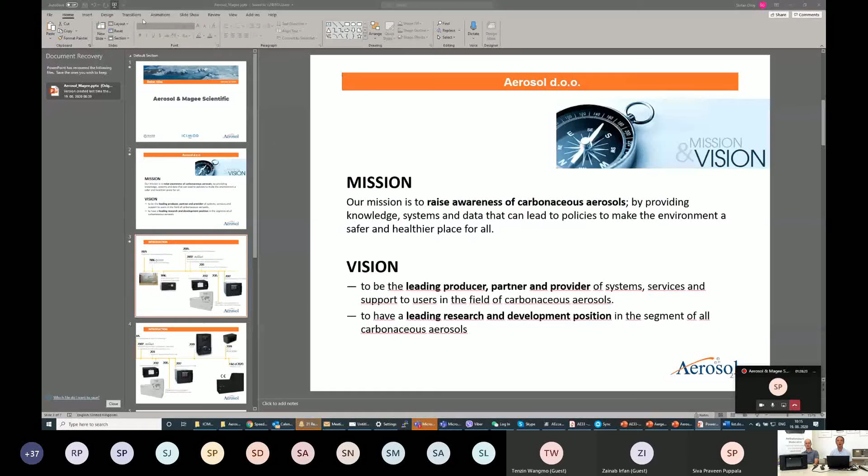Our first Aethalometer we introduced about 40 years ago. It was produced in California, United States, and Magee Scientific as a company started to produce and sell Aethalometers, or black carbon monitors, in 1986. In 1996, the production was moved to Slovenia, to Europe, and in 2007 we established the company Aerosol in Slovenia with full R&D and production capabilities.

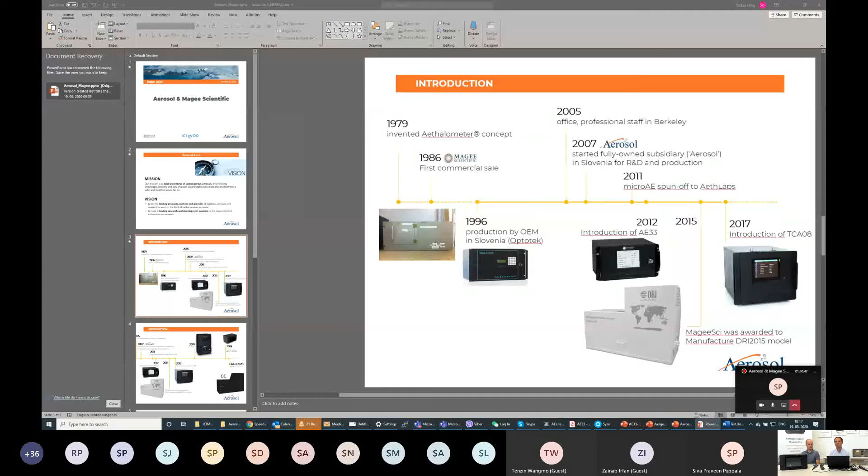The current version of the Aethalometer, the AE33, which we will talk about later on, was introduced in 2012. In 2015, we were awarded to manufacture the DRI instrument. This is an offline OCEC instrument. In 2017, we introduced a new thermal instrument for total carbon measurement. And in the last 2 years, we introduced CASS, the Carbonaceous Aerosol Speciation System. It's actually a combination of the total carbon analyzer and Aethalometer, and with these instruments we can measure the whole carbonaceous aerosols in ambient air.

Last year, we introduced the new portable Aethalometer, AE43, based on the same technology as Big Brother AE33, but with half the weight and half the dimensions, smaller. And this year we will introduce the new version of the DRI instrument, with some technical improvements.

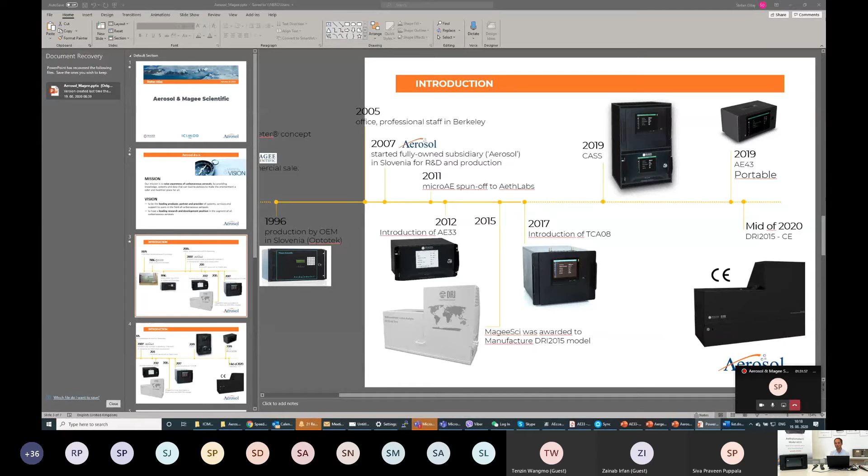Our aethalometers are all over the world, from Antarctica to the Arctic, from some deserts in Africa up to the top of the Himalayas. Last year we produced the 1,000th aethalometer, and of course our network of aethalometers is still growing.

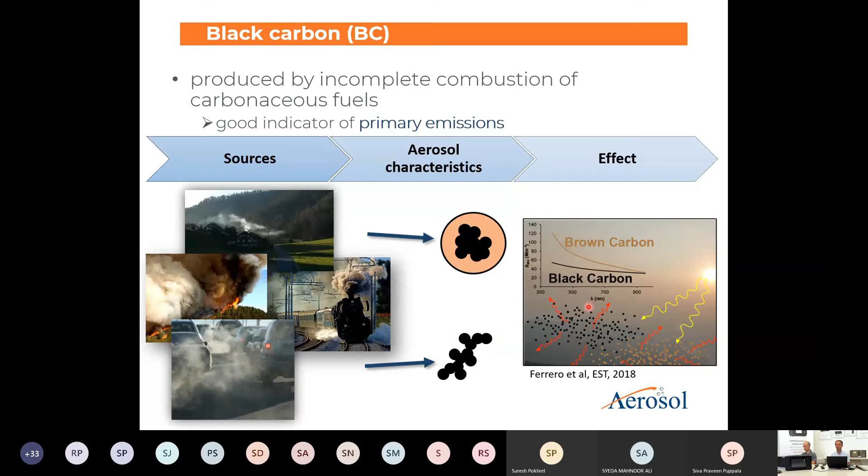These are special events, but in our world, one of the very significant sources is traffic, which uses mostly fossil fuels. Then this aerosol has some characteristics, like it could be fresh, could be old and already coated with some other elements, and has some effects. What is maybe more important is that black carbon absorbs light, and especially this effect, that it absorbs light, we use in our instrument to measure the concentration of black carbon.

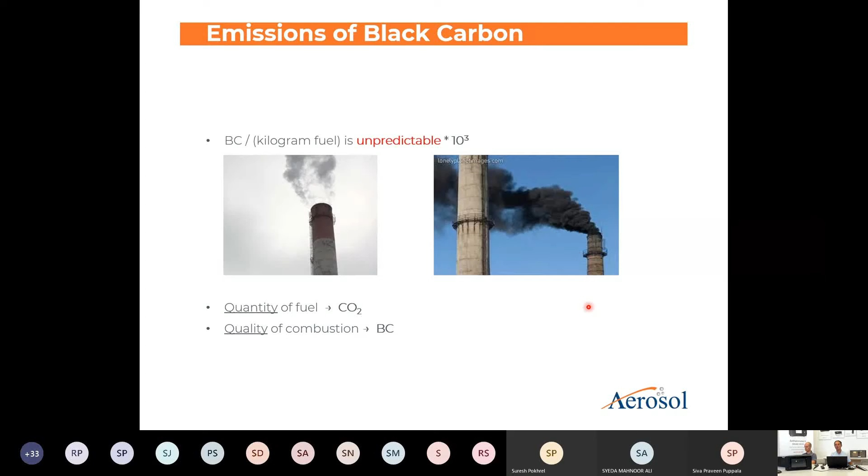Just as an opposite, CO2 emissions are highly predictable, because we just need to know how much fuel we burned, because from 1 kilo of fossil fuel we always emit the same amount of CO2. So black carbon, and this is very important for us, is highly unpredictable. So we cannot know in advance how much black carbon we will emit during the combustion.

Double role of the black carbon. Black carbon has two main roles. One is health effect, because the black carbon is very small and can penetrate even to the blood, because particles smaller than 100 nanometers can penetrate deeply in the lungs and even into the blood. So this is one very important issue of the black carbon.

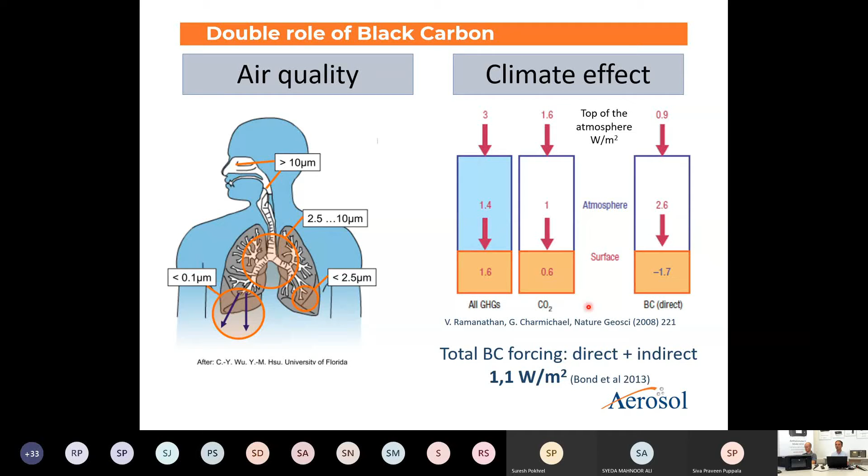Second is of course climate effects, and you probably know much more about these climate effects, but the latest research shows us that total BC forcing is about 1.1 watt per square meter.

And of course, all these properties of the black carbon lead us to our final conclusion from Lord Kelvin, as Lord Kelvin said a lot of years ago: if you cannot measure something, you cannot improve it. And because we want to improve the situation with the black carbon in our environment, we have to measure black carbon. That's why we produce an Aethalometer, which we think is the most advanced black carbon monitor in the world currently.

The Aethalometer for black carbon measurement is about 40 years old. Also, the principle of the measurement is 40 years old, and the principle is quite straightforward. We just draw an air sample continuously through a filter, and we collect the aerosols on the filter. Then we illuminate this filter, and we measure the optical transmission through this filter.

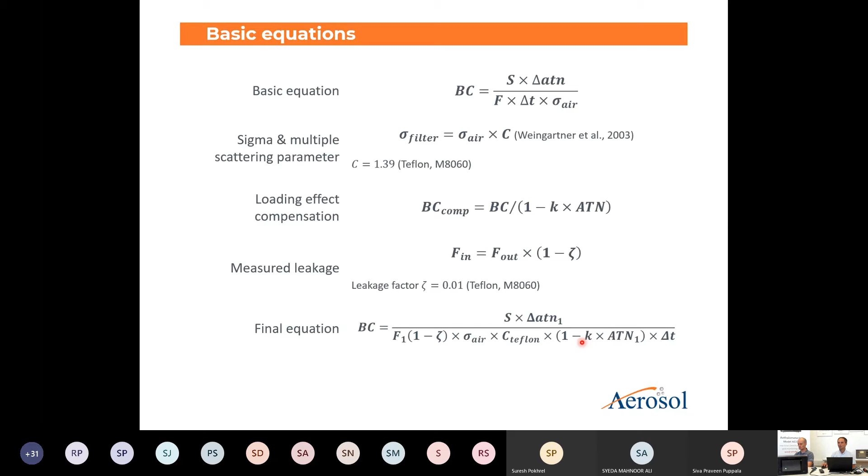Okay, so this is the equation. All these parameters could be found also in our instruments. Let's say, for instance, the surface area is fixed, and you can find it in the setup files. Black carbon concentration is on the main screen of the instrument. Delta T, or time base, is also on the main screen. Then delta attenuation, you have to calculate it out of this table, which is on the data tab.

Then you have here all information about the flow. Also the K factor is here, sigma air, and leakage factor, and the multiple scattering constant for the tape is also. So all these are here somewhere in the user interface.

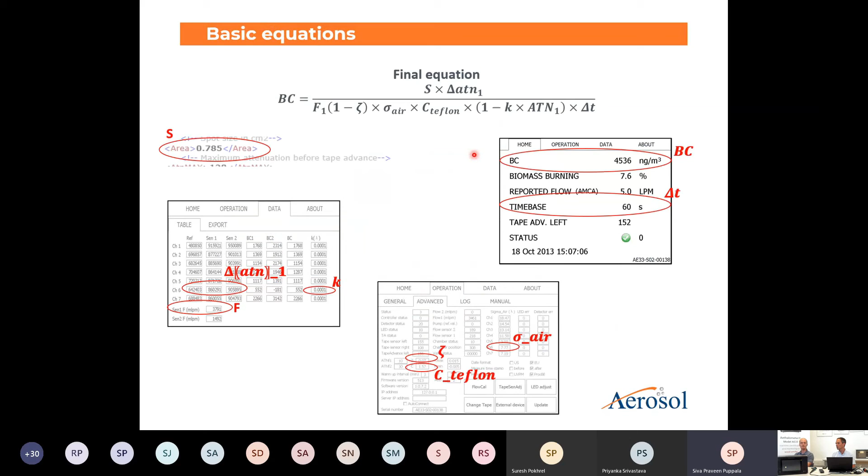I think the slides are not changing. Sorry? I think the slides are not changing. No. What do you see? Do you see the flow diagram? No, we see only basic equations. Really? I see the flow diagram. Yeah, because it's changing. I also see the flow diagram. Yeah, it is changing. Okay, must be an issue, right? Okay. It's okay? Yeah, please go ahead, Stephen.

Okay. So this is the flow diagram. As I said, we have 4 valves here. These 4 valves are because we want to lead the flow on different paths through the instrument. I will describe just two situations. If everything is normal, then we draw the flow like this, through valve number 4, and here we have a flow divider. We divide our flow into 2 different flows, one through spot 2 and one through spot 1, and then it goes through the mass flow meter to measure the amount of the flow, and then through the pulse damper and pump to the outlet. So this is the way of flow during the regular measurement.

We have some tests to check if everything is okay with the instrument. For instance, when we perform the clean air test, we close valve number 4, put it to position 1, and we open valve number 3 to 1, and then the flow goes like this. We start with the ambient air, go through the filter. This is the particle filter, and with this filter we completely remove all particles from the sample, and then the aerosol-free sample goes the same way. With this test, we can check the noise of the instrument.

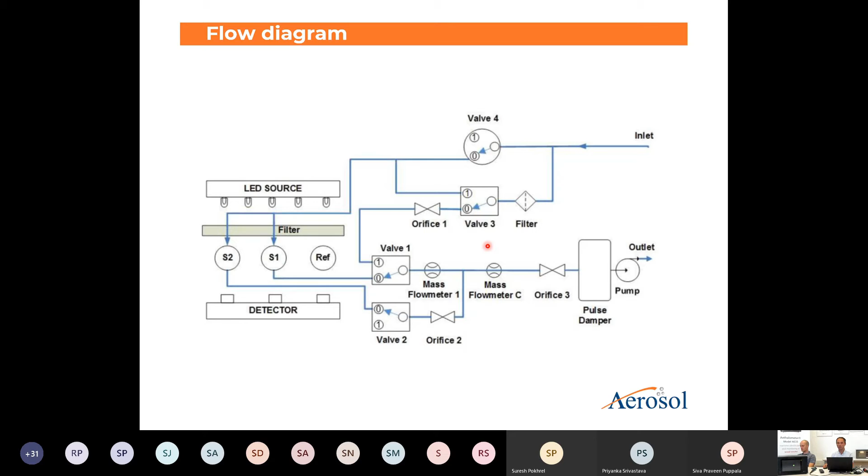During the clean air test, we expect that we will measure concentration close to 0. We will measure just the noise of the instrument. So this is one example how we can change the path of the flow through the instrument. And we have also other tests. When we calibrate the mass flow meters, we again change the flow through the instrument just to calibrate the mass flow meters. So that's why we have 4 different valves here. But this is the basic flow diagram of our instrument.

So now I will proceed with a few technical details of our instrument, which technical aspects are very important. One of the most important is the wide dynamic range of this instrument. On these 2 charts, we have 2 different examples. One is taken in Berkeley, California, where there is, especially during the summer, very clean air, and we measure a black carbon concentration of less than 50 nanograms per cubic meter.

The second case is from Kolkata in India, where we measure a concentration higher than 100 micrograms per cubic meter. That means between these 2 examples there is more than 2,000 times difference. And we did this with the exact same instrument without any exchange on the inlets or something like this. So this wide dynamic range is important for such measurements, and we are really very high with the dynamic range of the instrument.

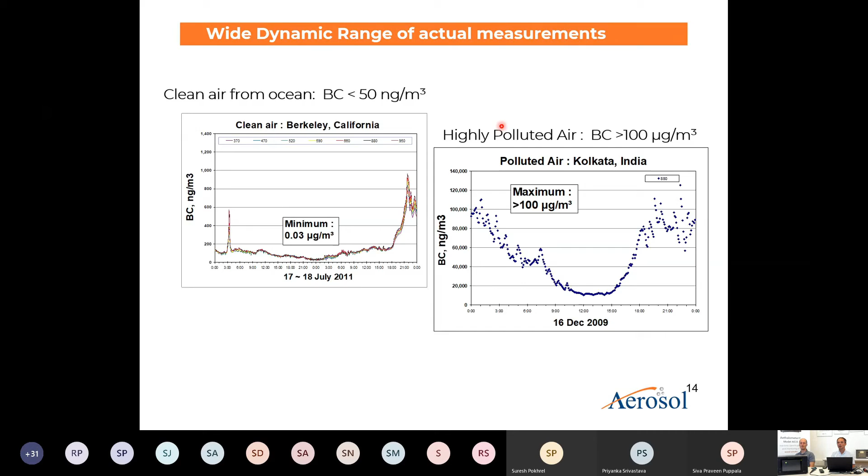Second technical aspect, what is also important, is the real-time measurements. The instruments measure with 1 minute or with 1 second of time base. Here is one example, where we have already 5-minute averages of measurement close to one street in one location in London.

With some post-processing, we got this type of chart, and what we can see here is a pattern: we have these morning peaks during the work days, especially Monday, Tuesday, and Wednesday, and then we can see that we don't have these morning peaks during Saturday and Sunday.

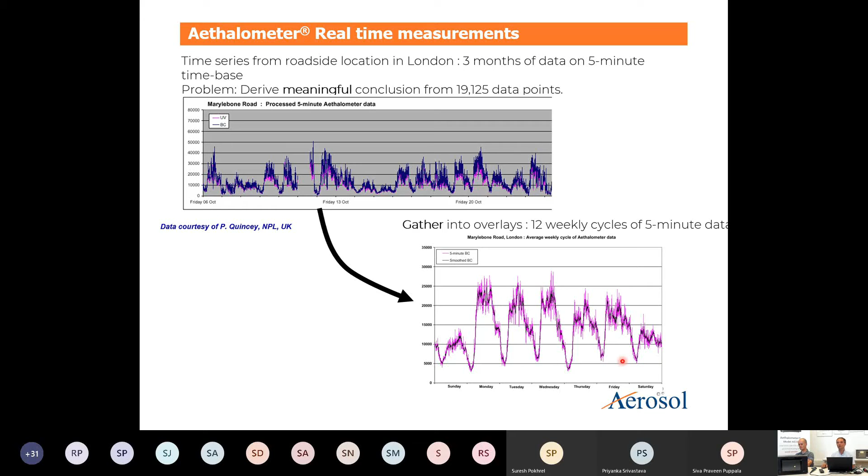So if you want to observe this diurnal profile, then you have to have as much data as possible, and this time base of 1 second assures you that you can really find some patterns in concentration during the day. Because our period is very short, 1 second, you are able to find some interesting patterns in the concentration of black carbon in the air which you measure. This is also very important.

Then this is maybe the most innovative feature of our instrument, loading effect compensation. As I already said before, when you collect the aerosols on the filter, the spot becomes darker and darker, and after a certain time you have to move to a fresh spot. You need to perform a so-called tape advance. But what is important is that inside of one tape advance period, we observed that the response is not directly linear. So with high attenuation, you will measure lower concentration of black carbon. It's not directly linear.

On this chart, the black one shows non-compensated black carbon concentration. The red one shows the already compensated data. This is the event when you move to the fresh spot, and in the non-compensated data you can see this big jump, and here again a big jump, while in the red line, which is already compensated, you don't see this jump. This is because the response is not linear, and when you change to the fresh spot, in the case of non-compensated data, you will see this big jump.

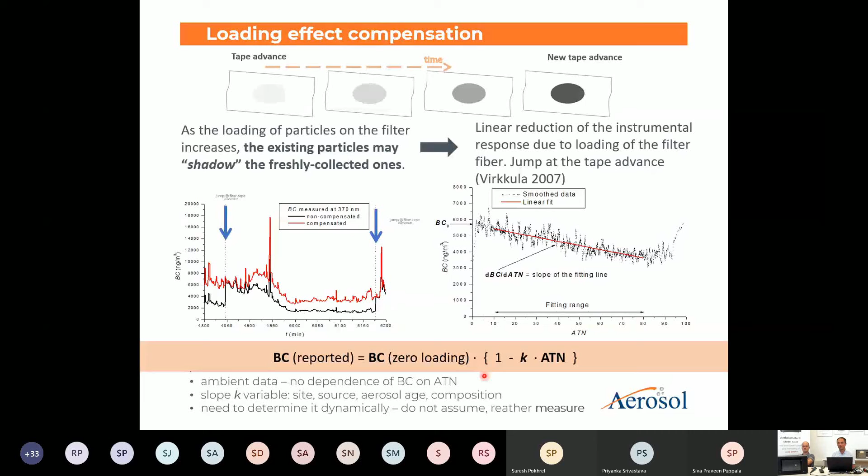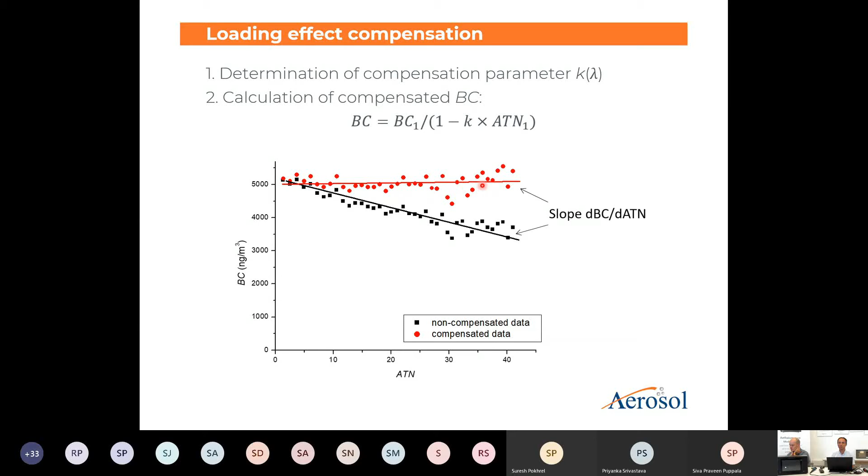And here is the equation. The reported BC must be compensated with the BC at zero loading, and you have to introduce this K parameter. The K parameter is well known; you can find more details in this scientific paper from Virkkula. Of course, you can do this with post-processing. With this K, you actually change the slope to a linear one, so that the attenuation will be linear with the concentration.

Our solution for this problem is the dual spot method. Dual spot means that inside our chamber we have a splitter that splits the flow to two different spots, in a ratio of 2/3 to one spot and 1/3 to the second spot. Because of this, we always have two spots on the tape, one darker and one lighter. When we calculate the black carbon from the darker and the lighter spot, we find two different concentrations because of this non-linearity, and out of this non-linearity we can calculate the K parameter.

What is very important, we can calculate this K online, so we don't need to wait and do this with post-processing. We can calculate it immediately and include this calculated K directly into our equation for the compensated BC. With this K, we calculate the compensated black carbon concentration without any jumps. As we can see, after changing the spot we have these jumps, but on the compensated BC these jumps are not visible anymore.

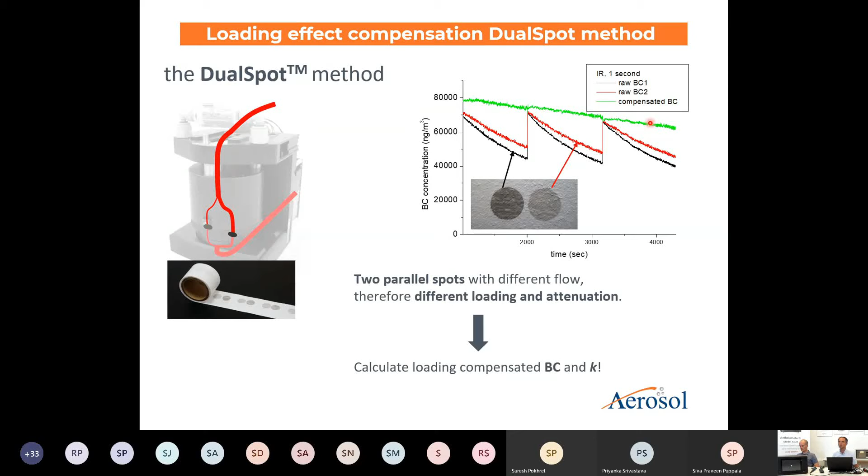I would like to mention that this dual spot is patented, and of course we are the only producer in the world which can use it. This is really, let's say, one of the big advantages of our instruments, that all data are directly compensated, and there is no need for post-processing. This is especially important if you want to immediately present or use the data on some web pages and so on. There's no need for any compensation or any recalculation of the concentration.

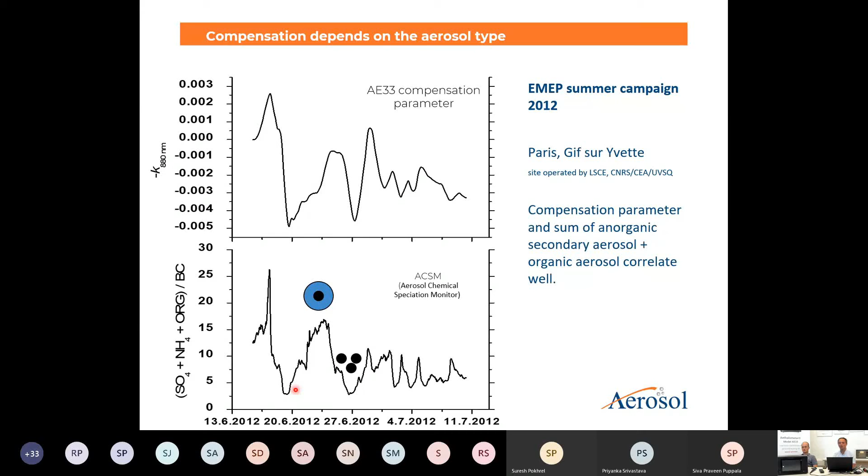And again, this may help you to discriminate between fresh and old black carbon. Where you have a high K factor at 880 nanometers, it means you measure old aerosols, old black carbon with some coating on it. And when you measure a low K factor, it means that you have fresh and very local black carbon aerosols.

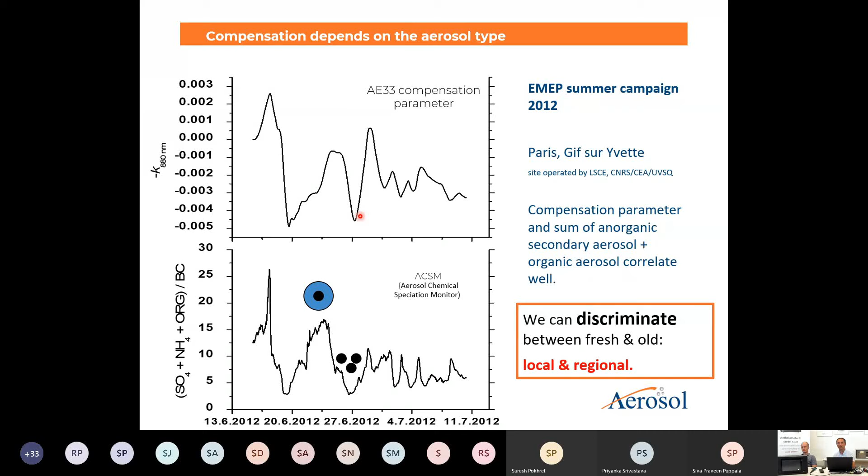A few more words about the loading effects: this algorithm is very sensitive, especially to temperature and humidity. And this is also true in general for the measurement. So if you want the instrument to measure properly, you have to warm up the instrument to room temperature. If you bring the instrument into a room, you have to wait for a while until the temperature of the instrument is the same as the room.

So you cannot change the humidity very fast, and also the temperature needs to be as stable as possible. It means that it's not very useful if you have air conditioning equipment close to the instrument. Also, this K factor is very small, and the default has some limitations: K minimum and K maximum between 0.005 and 0.015. But expected values for K are between 0 and 0.001. So this is some additional information about this K factor.

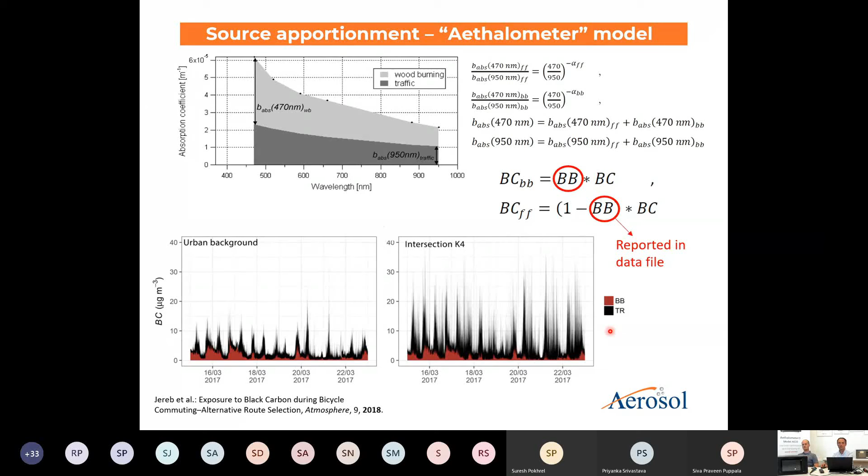So here is, let's say, a short overview of our aethalometer. Our aethalometer uses multiple wavelengths, and we measure absorption from the ultraviolet up to infrared wavelengths. Then we have a really high dynamic range. We also have loading compensation. This is done with the dual spot technology, which is patented, and we can do this in real time.

Then we have some automated quality assurance and quality control tests with zero, optical span checks and flow calibration. We will see this more later. We have really improved performance with low noise and fast time resolution, with the time base down to 1 second, and our instrument is quite easy to integrate into networks and easy to communicate with. More about dual spot technology can be found in this scientific paper.

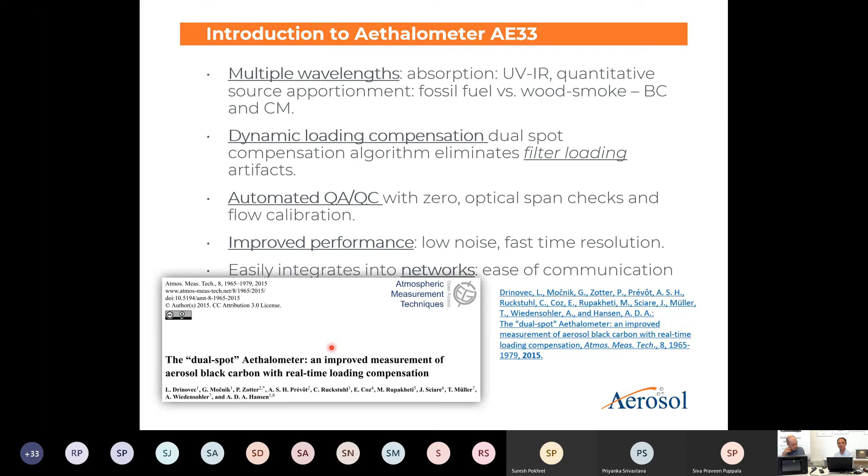Do you have any questions after the first part? Or should we proceed with the application examples? We can proceed.

Okay, if there is no question, then just a few words about application examples. I have a lot of slides here, but I will just go through them briefly, because later on Friday you will discuss much more with Martin about the applications which can be performed with our instrument.

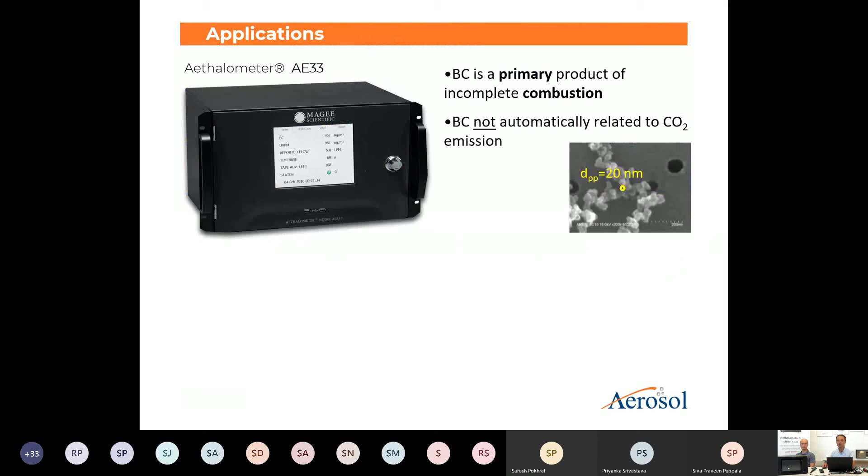Okay, so our instrument, our aethalometer, is used in different applications with different types of customers. Source apportionment of black carbon is a very typical application. Then we have a lot of applications related to low emission zones, transport abatement and everything related to traffic. Then we have applications connected with local and regional transport of air pollution, and a lot of studies about emissions in

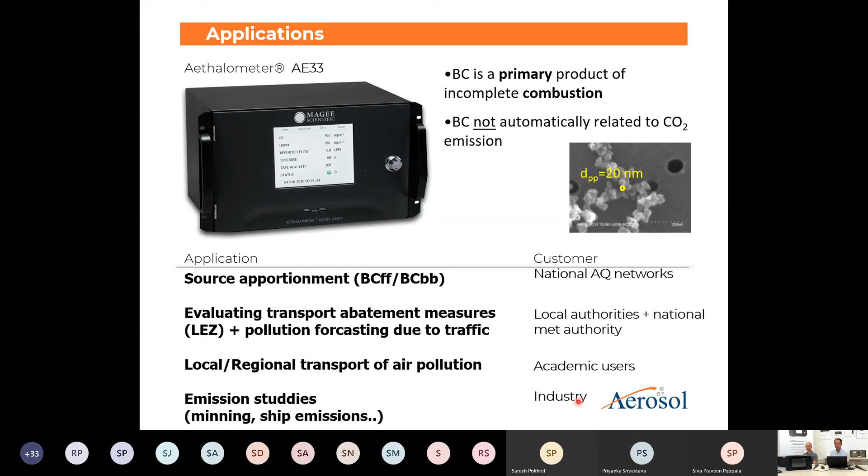different environments. Our customers are national air quality networks, local authorities and national meteorological authorities, academic users, and more and more often recently also industry. I will briefly point out a few of our biggest customers. One is the National Air Quality Network in the United Kingdom. They have more than 20 aethalometers installed over Great Britain. They measure source apportionment, ship emissions, traffic restrictions, and regional impact.

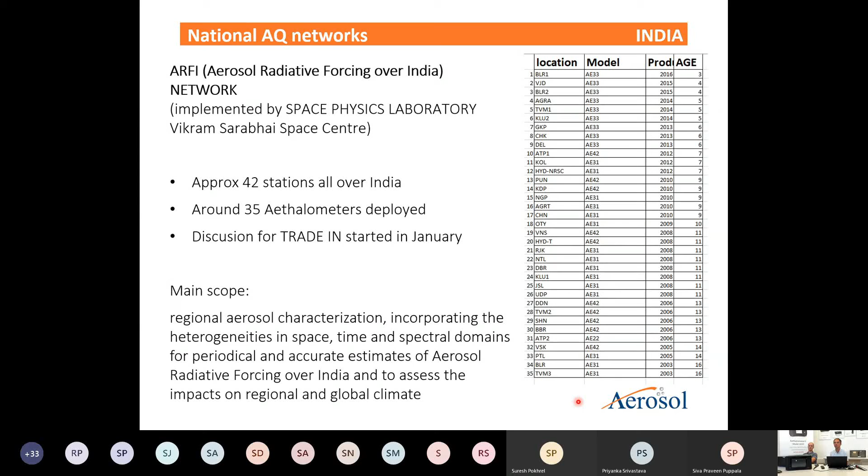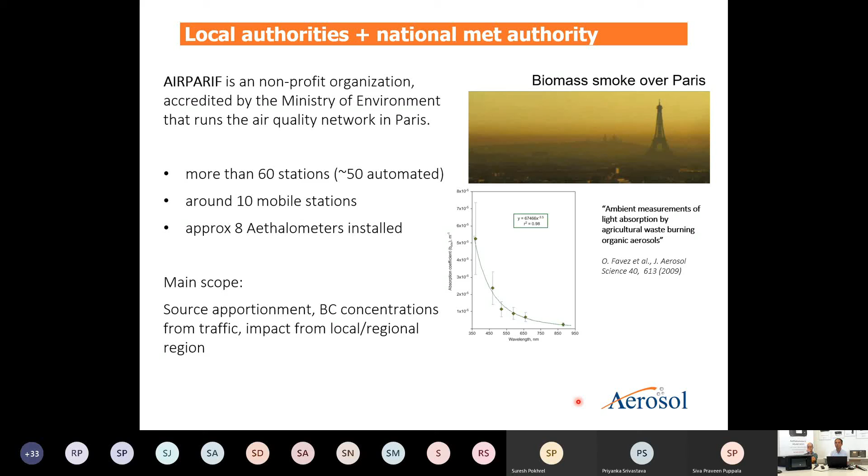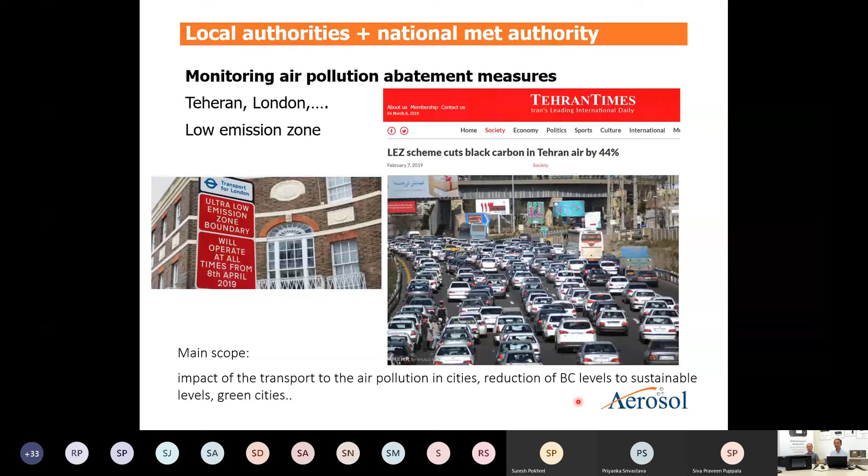Then from local authorities, we have installations in a few big cities like Paris. They also have some mobile stations. Then we have quite a huge installation in Tehran, Iran, and of course in London also. They are always related to so-called low emission zones in the city centers. Then here is one very interesting application here in our capital.

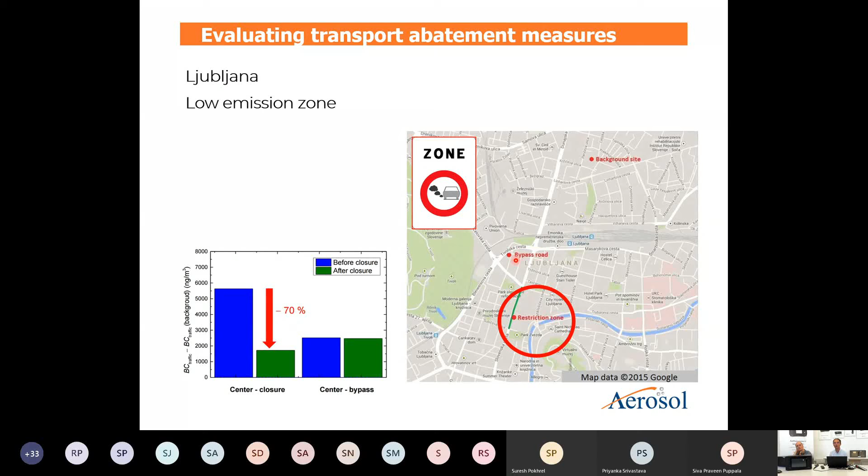There was an initiative to close the downtown center to traffic, and we can see that after they closed the center to traffic, there was 70% less black carbon in the air. At the same time, we also had one control instrument on the bypass. We didn't observe any increase of black carbon on the bypass. So this is one example of how we can measure and improve our environment.

One very interesting application is also emission factor measurement. If we combine our aethalometer with a CO2 sensor and measure CO2 and black carbon, we can calculate the emission factor. The emission factor is proportional to the ratio between black carbon and CO2. This is quite a nice application, interesting for local authorities.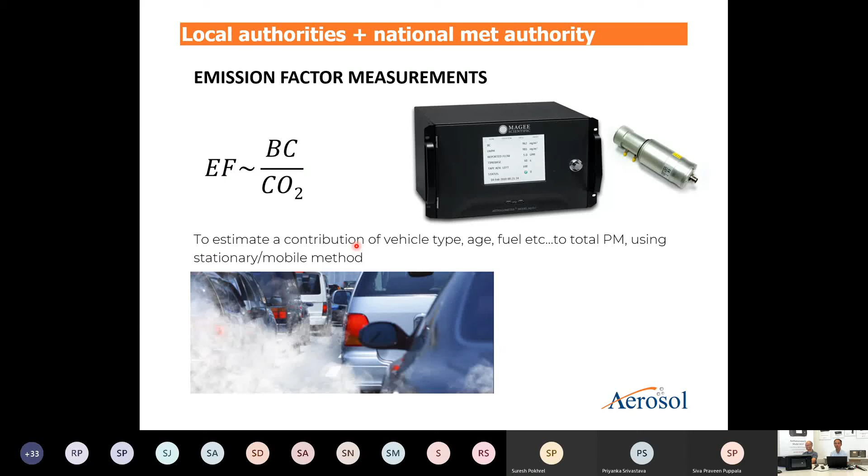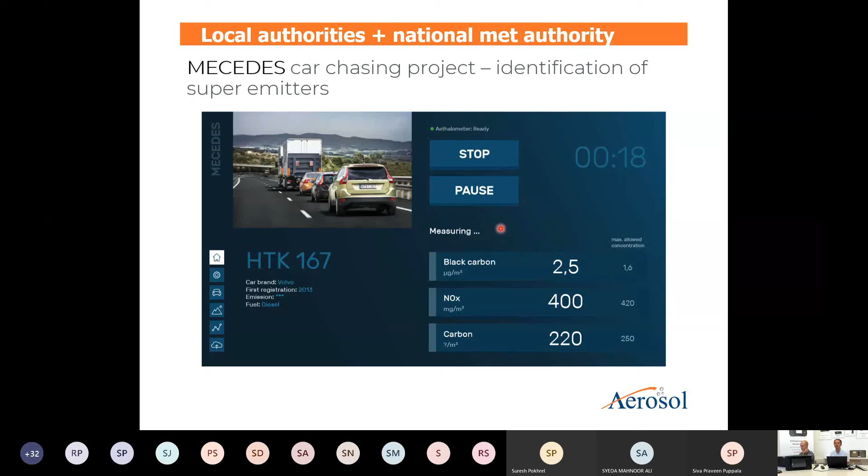And one of the implementations of this emission factor measurement is also this car chasing project. The project was named MECEDES. We chase the cars and we measure the emission; we measure the black carbon concentration behind the car and CO2. And we can calculate again the emission factor, and we can find super emitters, some cars or trucks which need to be repaired. This is also very popular with the local authorities. The project was done here in Slovenia.

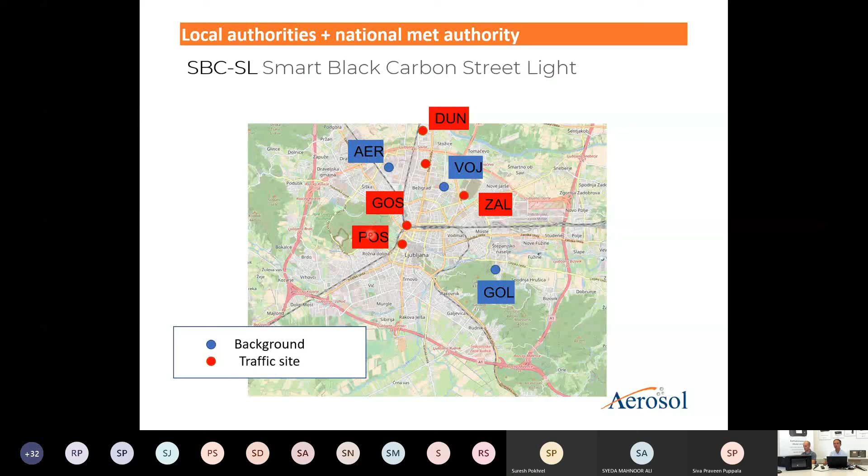If in some region you install more than just one instrument, you can prepare charts like this, like live maps of the pollution concentration in cities or in a bigger area. With some improvements or with some nets, you can also do some forecasting of the concentration in the next few hours. So this is maybe also very interesting. Nowadays we can find a lot of these live maps around the world, also with the black carbon concentration.

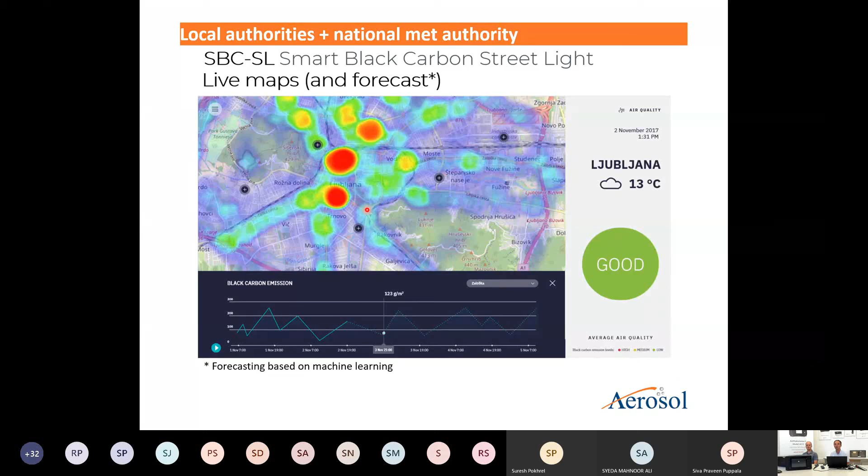We are very proud that Google Street View cars are also among our users. Currently we have about 10 Google cars equipped with the Aethalometer, and they constantly measure the black carbon concentration in, let's say, London. In London there are three different cars which constantly measure the black carbon concentration. Then we also have one project in the Netherlands and one project in the United States, where these Google cars produce some nice data about the black carbon concentration.

Academic users, we have a lot of course; one of the very big groups of our users are academic users. Here is one example from Brazil, where the Max Planck Institute established this observatory in the middle of the Amazon forest, of course not just with the black carbon measurement, but also with some different measurements. As I said, a very important group of our users are academic users. Academic users, like you, also measure the black carbon concentration at high altitudes and high installations.

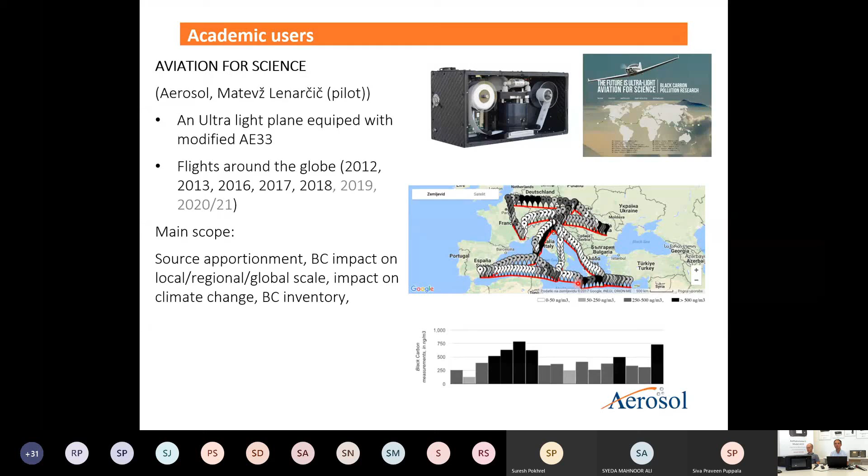We were also part of a very highly covered marketing project, where one of our pilots measured the concentration with a plane about 3,000 meters high in several campaigns over the world. And as I said, in the last period we also have some industry users. One example is here, where one of them measured the black carbon concentration in a mining facility.

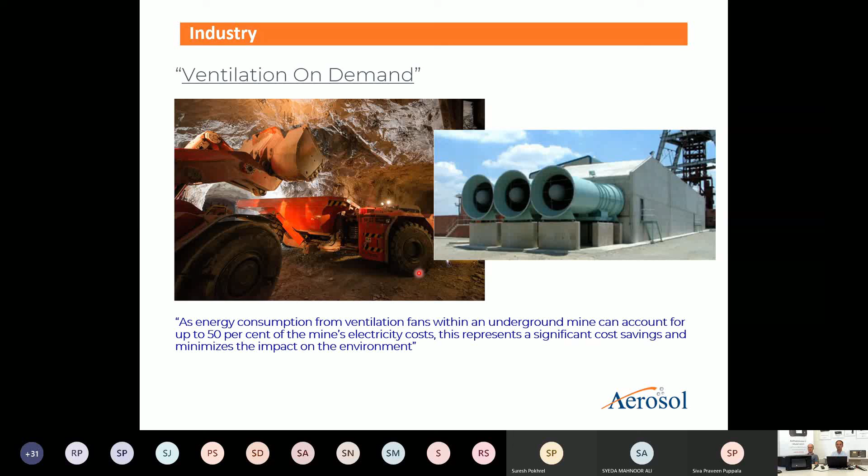Okay, much more about the applications which are available you can also find on our web page. There are a lot of papers describing different types of applications where our instruments are used. Okay, any questions about applications?

No. So then I suggest we just proceed with this AethNET. This is a very short chapter, and then we will have a small break. AethNET is one of the possibilities for our instruments to have a remote connection. There are three different steps or three different types of remote connection. One very basic one is this AEccessor.

If you install one special application on your computer and you have TCP/IP communication between the instrument and you, then you can directly communicate with the instrument, and you can directly change all settings on the instrument remotely. This is very useful. But in this case, you cannot download the data from the instrument to your computer. So the application is just like a screen mirror from the instrument to your PC to manage the instrument.

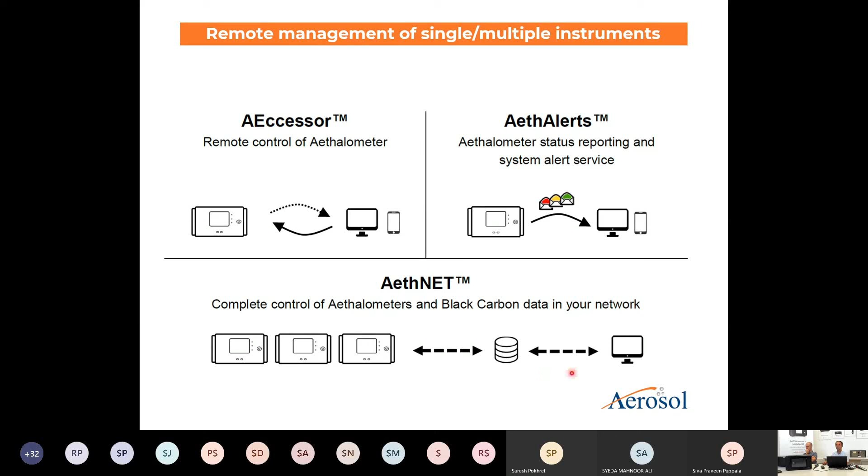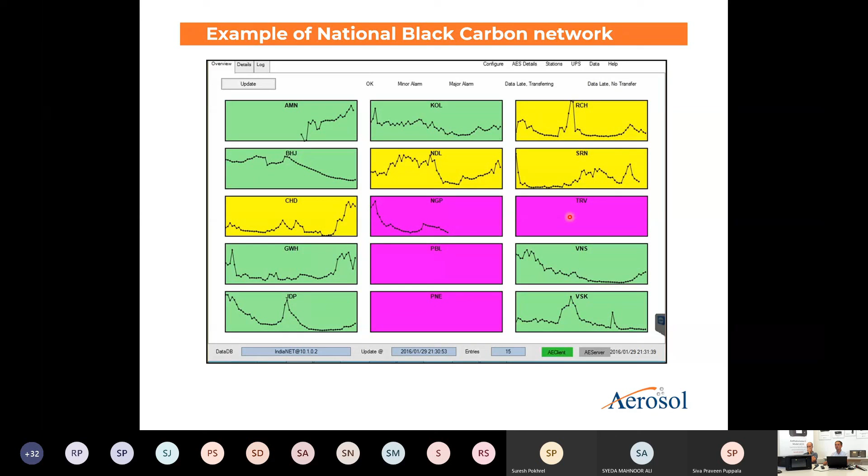This is very useful. I have here just a few screenshots from the server, how it looks. One square represents one instrument. If it's green, then everything is okay with the instrument. If it's yellow, it means something is wrong, but it's not crucial. If it's red, then the instrument is stopped due to some problems.

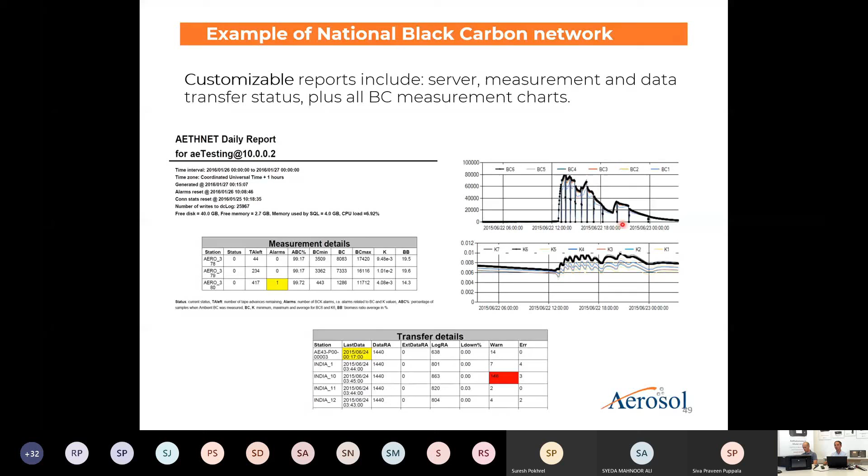Here are some charts which can also be produced with this server. This is the remote access, how the application looks if you have these accessories. So it's a direct mirror of the picture on the instrument to your computer.

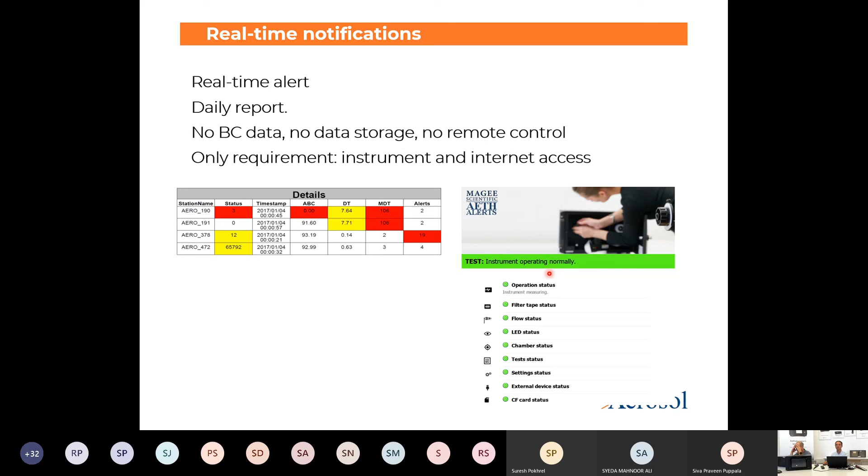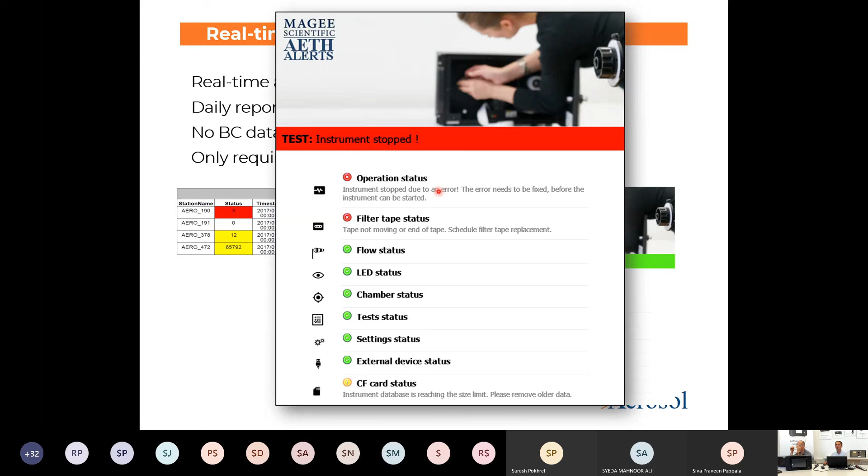And this is how the alerts look, how the report looks when you receive the email. You have a report about the status of the instruments. In this case everything is okay, so all is green. And in case something is wrong, you will immediately receive that the instrument is stopped, and you can check the instruments. So this is the end of chapter number 3.